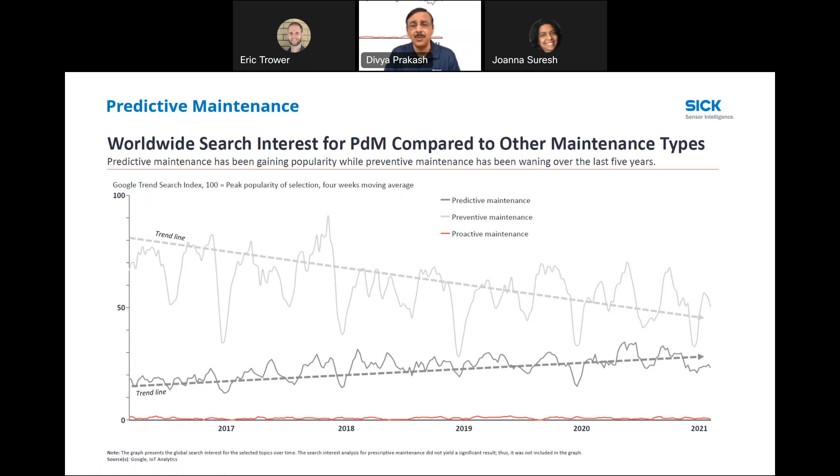So you don't do that. And so that is the waste of your resources of perfectly good oil that would have lasted you a few more thousand miles or a few more months, but then you just changed it just because you were being proactive. So this kind of shows you where the industry is changing out there.

And so let me take you a little bit back in the typical maintenance approaches that have been out there in the past. The one on the left, which I call reactive maintenance, everybody is aware of it. At least in my house, we are. Something breaks, you call the people, you buy a replacement, and you replace it. So you're acting after the incident. So there's really no predictive.

Now, if you want to do that in a manufacturing plant, basically the whole production stops, especially if it's critical to your whole manufacturing, because the machine went down and then you have nothing. Now you're scrambling for spare parts, and nowadays, especially with the supply chain issues out there, you may not even get the part for a few months. So that is reactive maintenance, the reactive service acting after an incident.

So what happens? You have high downtimes, but it's the easiest to implement. You do nothing. You just sit. You wait for something to fail and you go do it. Well, if you're running a business, that's not the model you want to run, because then all of a sudden everybody's idling, the machine's idling, the plant's idling, and there's nothing being produced. So you're not making money.

So let's go to the middle option, which is preventive maintenance. This is back to my analogy of the oil change. Cyclical service intervals, you just go every 3 months, you change it, regular actions to minimize. And if you look at the chart out there, you know that typically based on your history or your past experience, the bar graph is going till you see that green X, where it says still usable conditions.

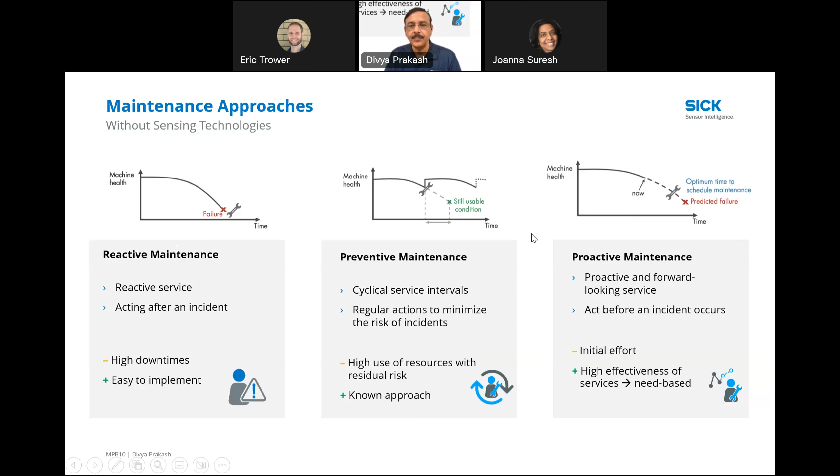Now let's look at approach which we are doing with sensing technologies. This is where we actually bring in a sensor and we measure the health of the machine. So one of the most common and which is available today is called condition-based monitoring. You put the sensors in there, it measures certain variables that are out there. And I'm going to go back to my analogy of the oil in a car.

There's a sensor that's measuring the clarity of the oil to see how dirty it is and how burnt it is, and then it judges from that the life, and then tells you that your oil is slowly becoming dirty. It's time to go change your oil. And that is being done by the sensor, that's being done by the analytics that is on the sensor.

And so you're not changing something if you didn't use the equipment for 6 months and the oil is as good as new and sitting out there. But if you went with the earlier approach of time bound, you would still change it. Here you're minimizing that, so you're not wasting your effort on a task that is, I wouldn't say redundant, but it's not needed immediately. So that is condition-based monitoring.

So maintenance done when equipment problems have been registered. So the sensors registered some problem with the equipment, you go do it. If everything's running hunky-dory, everything is good, you don't have to do anything. You can rely on the sensors telling you when it is. And it is easy to implement, whether it's an existing sensor, you can retrofit those by putting some others, or if you already had some vibration sensors or others on board, you could leverage those.

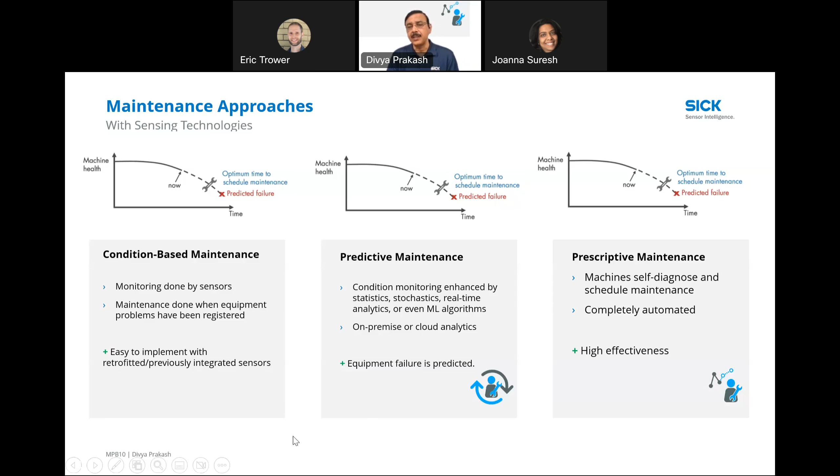I talked about a current sensor that can measure the amount of amperage that motor is drawing. So we know that something is wearing out and is pulling a lot more current, or there's resistance. Maybe the bearing needs to be lubricated because it's getting dry, so it's drawing more amperage. So these are the sensors that go in for condition-based monitoring. The one that I'm going to focus on mostly moving forward is vibration analysis, or sensors that do vibration analysis. But before I jump into that, let's look at where the opportunities are for this predictive maintenance.

And I jokingly say anything that shakes or rattles needs vibration analysis, needs predictive maintenance, because it can fail, it can die, because it's shaking, vibrating, and someday something will get loose or fall off. So manufacturing definitely needs condition-based predictive maintenance. Energy sectors, same thing. Transportation, Eric mentioned that in the introduction, utilities. There are other industries like mining, healthcare, anywhere. Anywhere we can measure the condition of something, we can have predictive maintenance. So this is a wide topic, but we will restrict ourselves to manufacturing in the discussions moving forward.

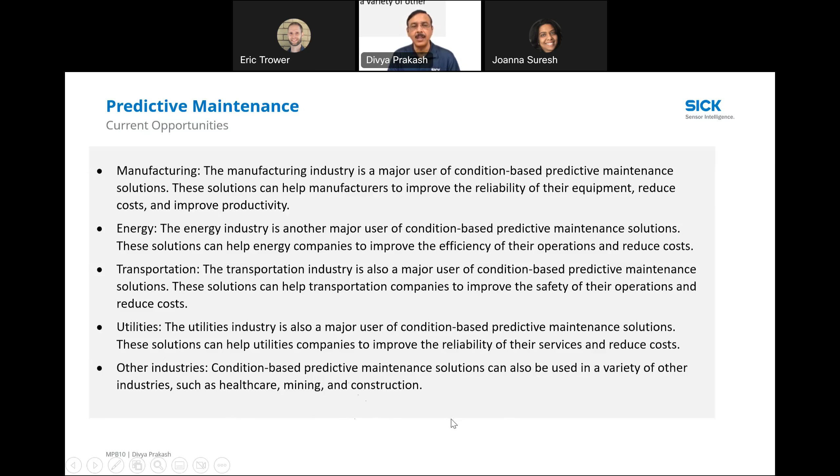And what I'm going to use to convey this condition-based monitoring concept is vibration analysis. So I'm going to use the example of our multiphysics box. We call it multiphysics because it measures more than one; it actually measures 3 different variables, and it's really a very powerful tool, and it's no bigger than a quarter.

If you want to look at the size of it, it's a little bigger than a quarter. I won't say a dime, a quarter. And it has a lot more capabilities built in this small little sensor. So this sensor from SICK is designed to measure temperature, which is, if you mount it, the surface temperature on top of the motors or pumps or any device. It measures vibrations in all three directions, X, Y, and Z coordinate. And then it also measures shock.

So if, for example, you have it on a motor and it gets hit by a forklift or a big truck or something, it'll measure, and it can measure up to 200 G of shock. So you know when it happened, who hit it. It's a good way to know that this motor needs to be in a different space because whoever is driving by is hitting it, and the sensor will fail. Though it has nothing to do with the actual operation of the sensor, it's the external factor. So you can get both the running of the internal diagnostics and externally people affecting it.

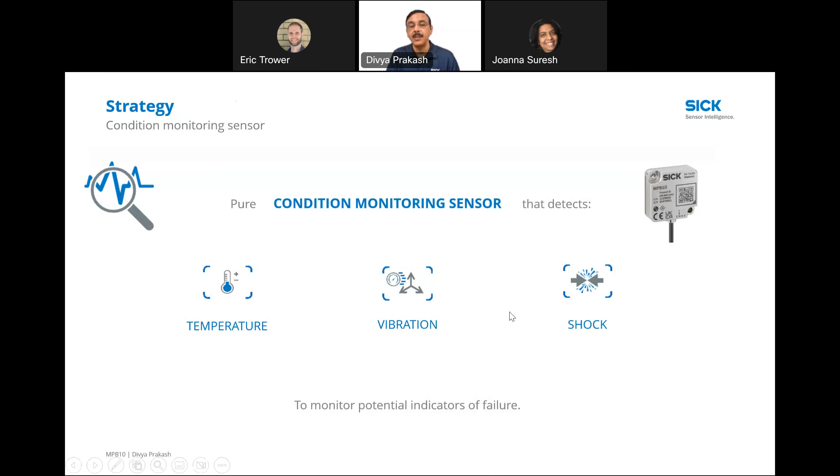So shocks and vibration, temperature. This is a good example of one sensor measuring all these three conditions and giving you a health of the device that it is mounted on, and then you can take action on it right away. So why would we do something like this? In manufacturing, why would you do condition-based monitoring? Why would you want to do it? I'm happy, I'm running, going back to saying if something fails, I'll fix it, right? Well, you don't want anything to fail. You want to know before it fails so that your production keeps going.

So if you want to extend a machine lifetime, you want to extend the machine's availability so I can keep making products. I want to reduce my maintenance costs so I don't need too many maintenance people running around trying to fix it. And then, of course, I want to increase my production quality. I want to increase my throughput. So how am I doing that? I'm doing that by condition monitoring, where I monitor my critical assets, I monitor their condition, and then I do the diagnosis of the data that I have.

How do I do that? There's different ways and different complexity or different scenarios where you can do that. You can do it very simplistic: pop it on the machine, put a little stack light next to it, it turns red when you think some things are not going right. Any of these, when they deviate from the thresholds that you have set for them, can go ahead and raise an alarm. If you wanted more analysis, you wanted to see the whole trend charts and everything else, you can bring that data out through a secure bridge gateway or edge gateway or something else and visualize that locally on a dashboard.

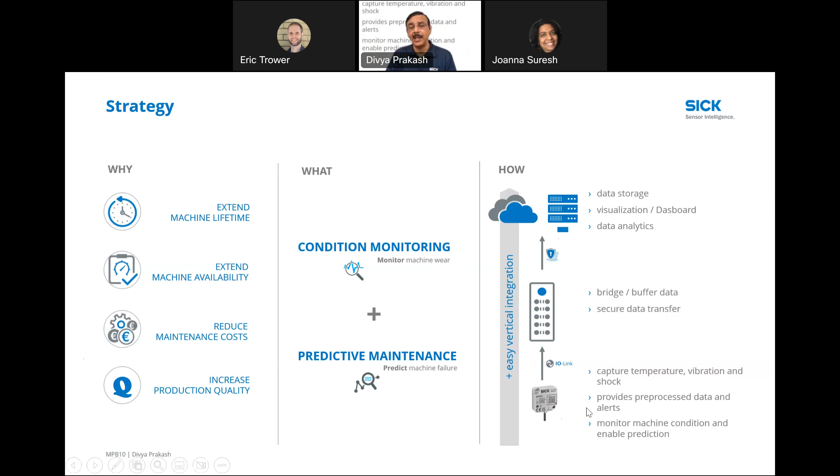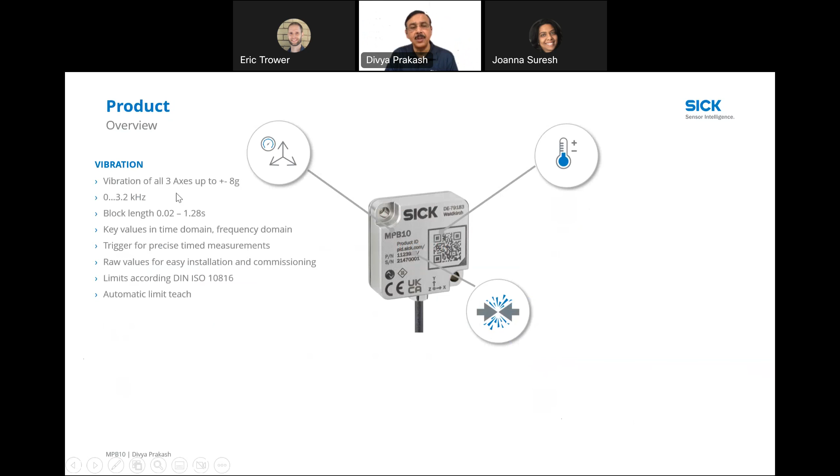So let's look at the sensor. I specifically want to show this sensor a little bit. A lot of people say condition-based monitoring, we have all this other stuff. Look at how capable this sensor is, but how simple it is to install and to implement. So I talked about vibration. I'm not going to read all of these; you can read that on your own. But what I said at a high level, we measure on all three axes, X, Y, and Z, and it can measure up to 8G of vibrations. And then we have 3.2 kilohertz, block length.

So these are not just the simple sensors that you used to have in the past. These have a lot more brain to them, a lot more analytics built in, and I'll explain that as we go further. So it is not just a simple sensor measuring just vibration or the shocks or the temperature. The ranges are shown right here for this one particular product, the MPB10 that I'm showing right now. But this gives you the idea that you're getting multiple things.

You can measure the surface temperature. If the bearing is getting too hot, this will pick it up. If you get hit by something externally, the shocks, it'll pick it up to 200 G. If it starts vibrating in one place because there's a misalignment of the shaft or the bearings are wearing away and the pump's now vibrating in one particular direction, it'll guide you to what kind of problem it is and where it is happening.

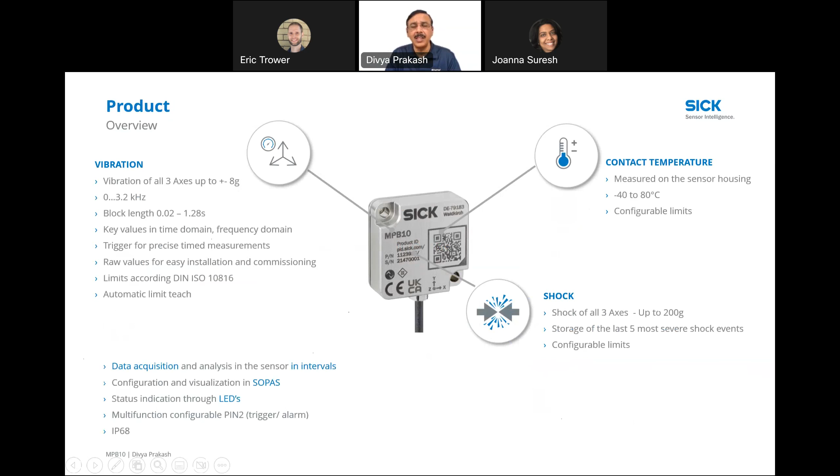So the strong part of this is it's a little bit different. It's got smarts built into it, and this is where the condition-based monitoring is coming in. We don't just give you the raw data. A lot of times with the sensors out there, yeah, I've got the raw data, but I don't know what to do with it, right? There's no shortage of raw data. Give me data that are effective, that are actionable, so I can take some action on it.

So what this particular sensor does, in our case for condition monitoring or vibration analysis, is it reads the values for a certain period and evaluates over the period the root mean square of acceleration and velocity of where the vibration is happening. We'll cover the more technical side in a future webinar when we deep dive. But based on that, now you know which way you're trending: up or down, whether the vibrations are going up or down.

And there's a lot more you can configure using our tools. You can even have local indications through LED if some thresholds are crossed. Or, as I mentioned earlier, you can wire it up to an external alarm that'll sound in your plant if some critical asset is going out of the way. And of course, it is an IP68 sensor, so you can leave it out there. It's got dust resistance and water resistance.

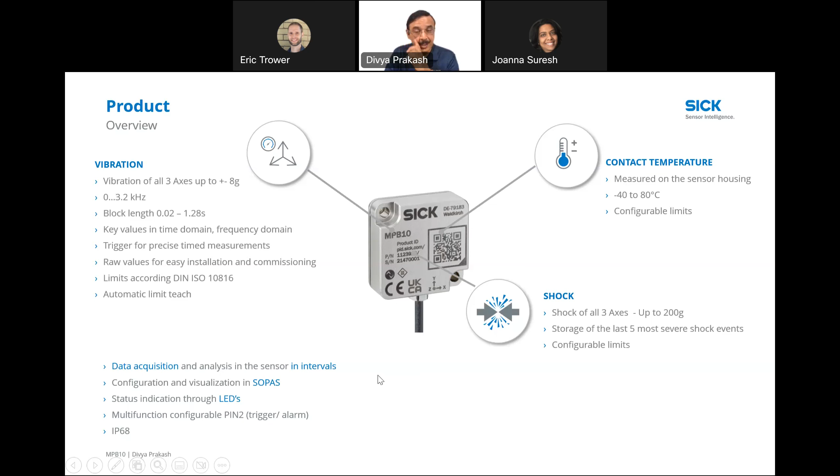Quick example, I mentioned this in the past: we're not just giving you raw data. We're taking the data that's coming in over a period of time, which you see here called processing time. During that time, we are doing the analysis to see what's happening. So here comes the raw data, block one. We take that data, we process it, then we take the next set of block data. So what we're giving you is actual analytical data, not just raw data. That's one sweet thing about this sensor. There's a lot of analytics, though it is such a small sensor.

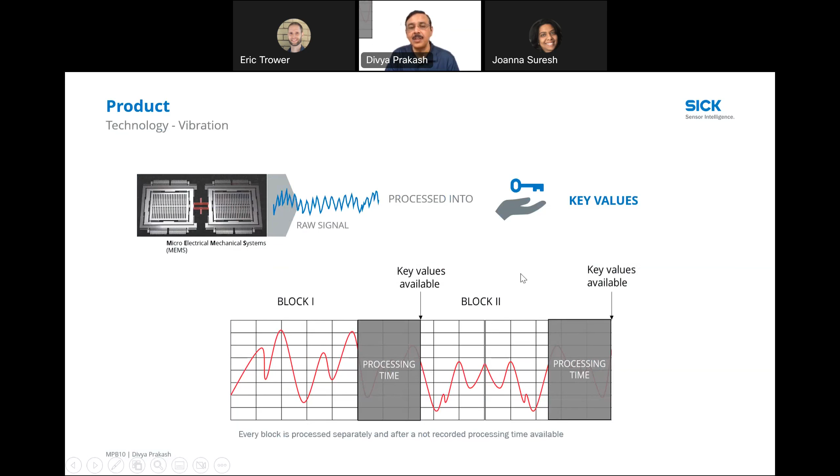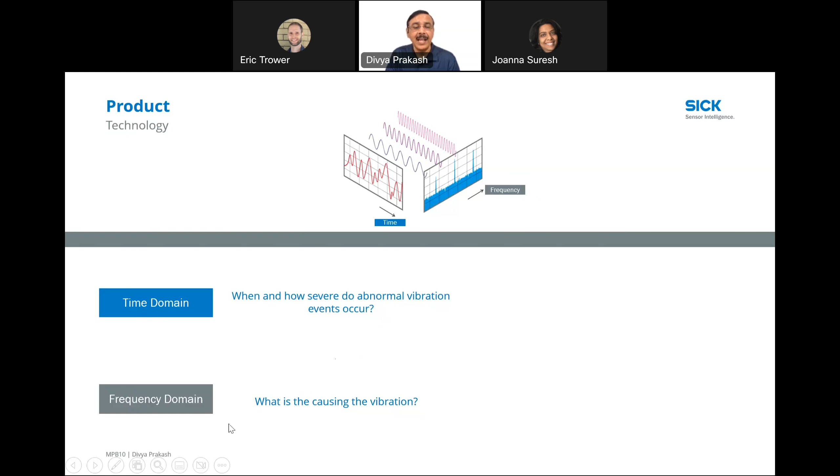You can use it in two different ways: as a time domain or frequency domain. For those of you already savvy in vibration analysis, this will make sense. In very simplistic terms, when and how severe abnormal vibration events occur, you can get from the time domain. And the frequency domain tells you exactly what is causing the vibration.

So as part of this little sensor, you're getting all these values: root mean square acceleration, velocity, variance, skewness, kurtosis, you name it. And on the frequency side, you get the dominant peaks, fundamental peaks, and up to 16 peaks. Just to explain, everything vibrates at different frequencies. Even on the motor, the bearing vibrates differently, the arms, the belts, they all have their own harmonics. And based on which peak is dominant, we can know where the problem is coming from.

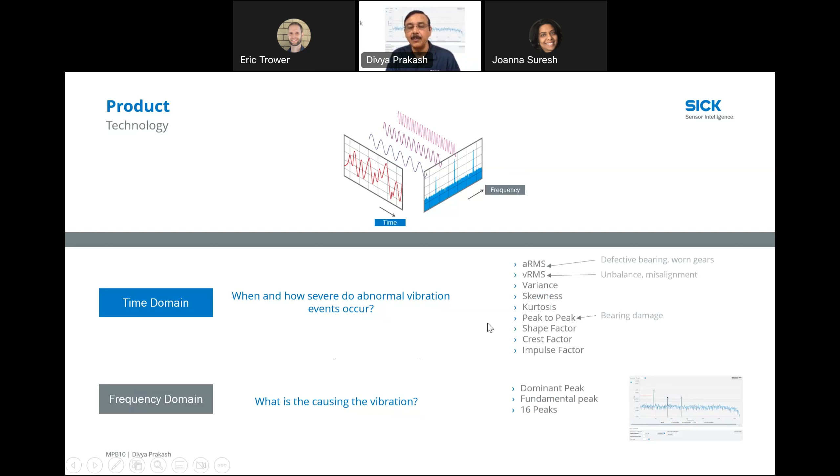So these are some of the analytical tools available in condition-based monitoring. You can take this further and apply analytical tools, and then it becomes predictive maintenance. Here's an example: if aRMS is ramping up, we know it's a defective bearing or worn gears. If vRMS is moving up, we know it's unbalance or misalignment. If peak to peak is changing, we know it's bearing damage. We can apply a lot of these rules and tell you exactly what is going wrong.

The other thing to keep in mind is there's also an industry standard, ISO 10816. Of course, it's been refreshed. Now it's ISO 20816, but it's still the same with a few minor changes, and these are rules that apply.

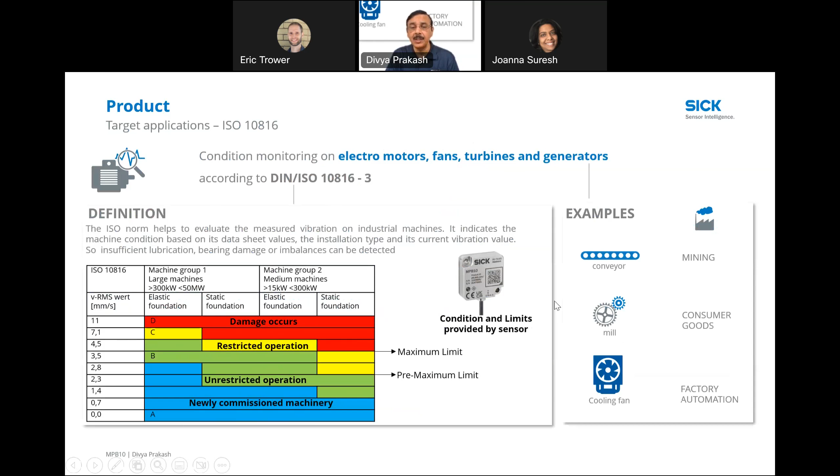We are even seeing examples where people want to use it in the malls on the conveyors and escalators that are running, to see the vibrations on the motors that run those, because if some of them start vibrating, those escalators are going to fail. And you can take preemptive maintenance on those, or predictive maintenance on those as well. So the examples and the applications are diverse, and it could be used multiple different ways.

This is a little bit more detail. I don't want to dwell too much on this one, but just to show that based on your history, as I mentioned earlier, if you knew how long it lasts, you can set the max and the minimum limit, and then alarms. If you don't know it, you can let it run for a while and let the system auto-teach itself, and it'll know that if I'm running now, for example, this is my normal operating vibration. So plus or minus 15% of this will be my threshold. If I start going more than 15%, that's my high. If I start going low, that's my low, and then things are not right there.

The other one is if you have done a lot of vibration analysis on your machines in the past and know what the thresholds are, you can manually set those up. And now you don't have to do these random checks on these machines or call an external party or service to come in and do vibration analysis. Now you are getting real-time data, and as soon as things start switching one way or the other, you get alerted right away. So there's two different ways to configure those.

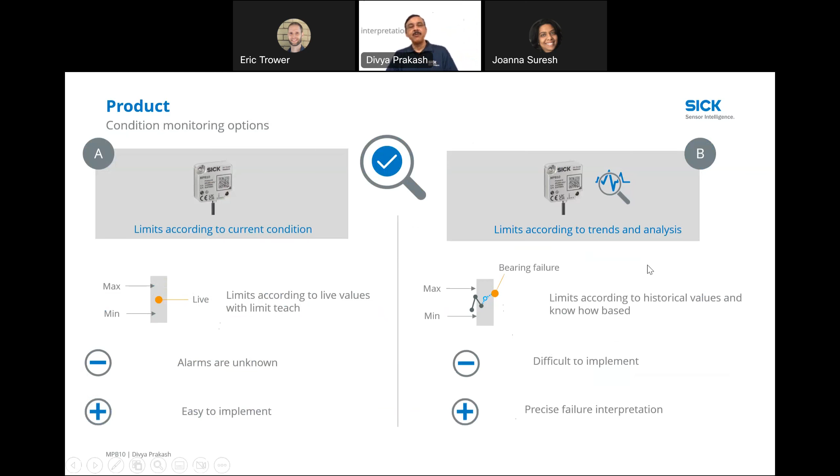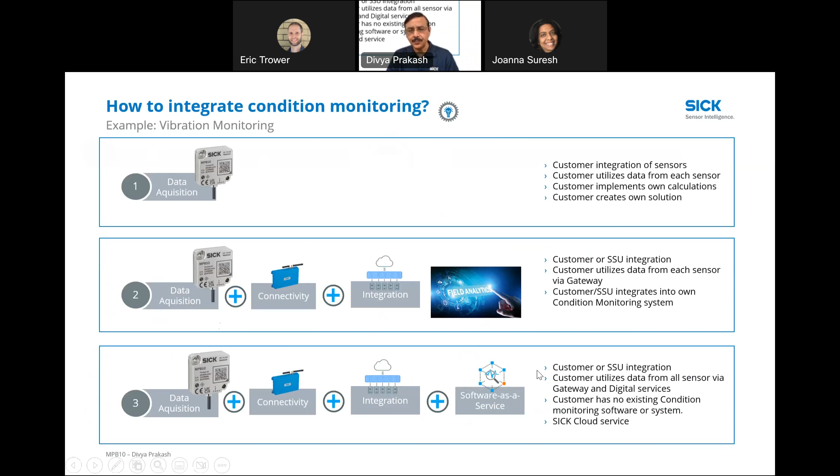This is another way how we do it in a cloud setting. We have edge gateways where you can pull the data into an edge gateway and push it up into the cloud, where it can give you all the analysis and analytical data. I just want to throw that in to show that these are current solutions available today, and it's not futuristic. All the solutions exist today, and we're adding more and more of the analytics, the AI, the machine learning, and other aspects into it, and giving that to you in a browser for you to do the analysis and act on any alarming that happens.

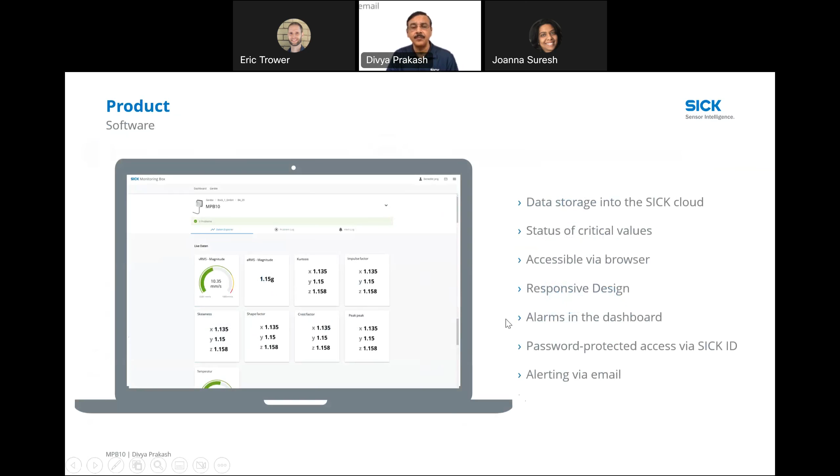You can mount it different ways, and we give you all the accessories to do that. So it's a complete solution that is already out there. So this is not futuristic predictive maintenance. It's here today. The prescriptive is where we are headed, and pretty soon, with the way the technology is moving today, we will be there shortly with all the analytical tools that are available to us.

So I went through a lot. I covered a lot, but I wanted to focus on condition-based monitoring because that is the smallest Lego block that leads to predictive maintenance, that leads to prescriptive maintenance. And hopefully we covered a lot of that, and you get a better understanding using just vibration analysis as an example.